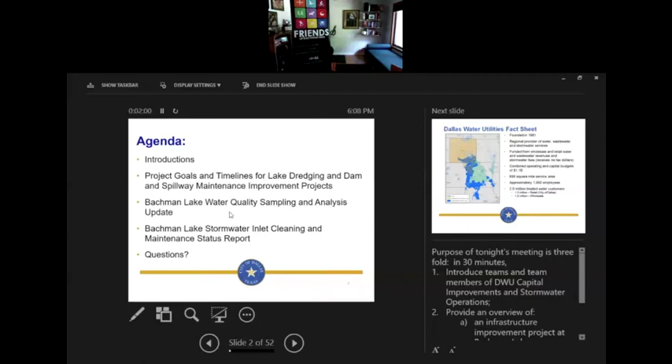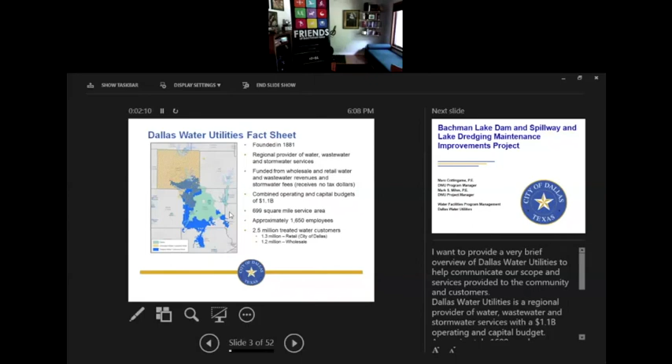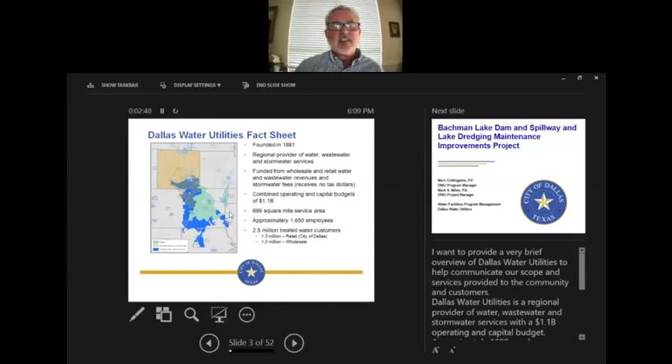You should have in front of you a map, generally speaking, of Dallas County and some of the surrounding counties with Dallas in the middle. Just wanted a brief overview about Dallas Water Utilities and to communicate our scope of services and what we provide to the community and customers. Dallas Water Utilities is a regional provider of water, wastewater, and stormwater services. Our operating and capital budgets range about $1.1 billion. We have about 1,600 employees and serve about 2.5 million customers over a very large area — about 699 square miles. Dallas Water Utilities' responsibilities include operation and maintenance of its infrastructure to continue providing water, wastewater, and stormwater services to the customers of Dallas. So that's just a brief overview of Dallas Water Utilities.

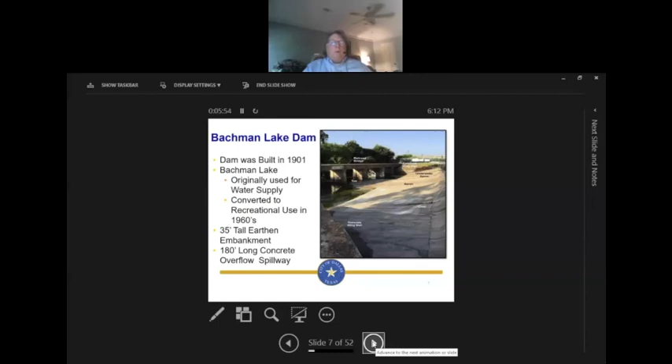This is a concrete spillway. This is a railroad bridge that we're able to bring rail cars of chemicals needed to treat the water to the Bachman plant. And then this is the spillway that conveys the water. On this side is the emergency spillway.

In the event of a high flood condition or really heavy rain, when the water level rises in the lake, dams have an emergency spillway to protect the earthen embankment from erosion. So it spills over through this low area and works its way down this way. There's a pond back here with some trees, and the work we'll be discussing will involve building up the earthen embankment on this side and replacing this concrete spillway and the railroad bridge. Also, the trees that have overgrown into this channel will be removed because we need to improve the passage of water for flood protection.

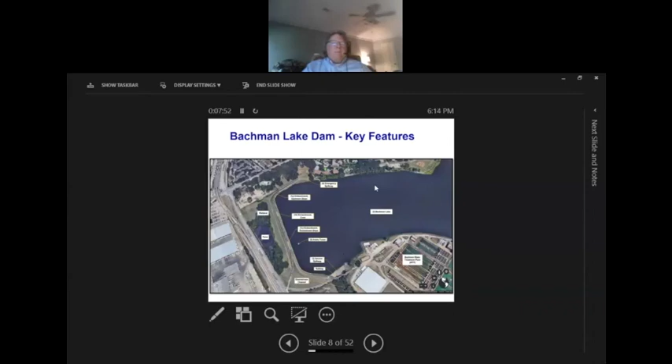And part of that is dredging of the lake. Over time, runoff with soils and erosion from the creek bed upstream deposits in the lake, and the lake has become quite shallow to the point where rowing sports and so on really can't use large sections of the lake because it's so shallow.

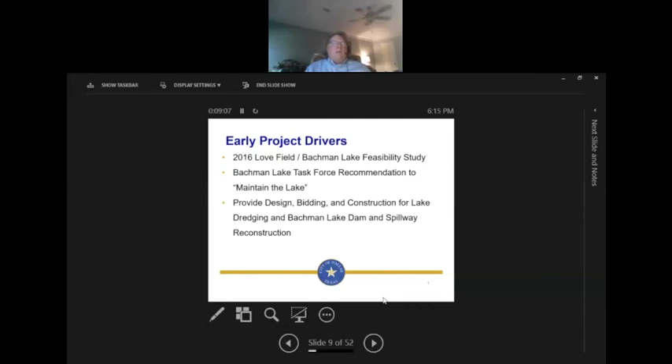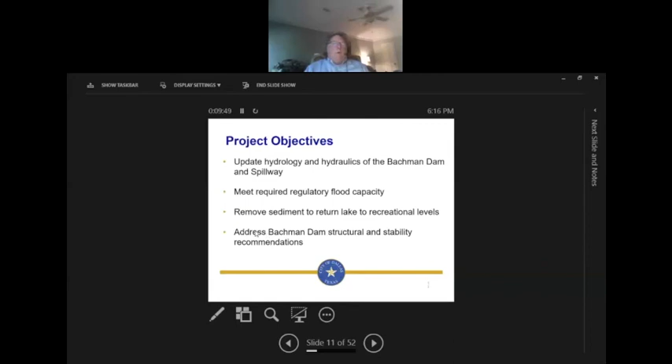So let's talk about the goals and timelines coming up. One of the objectives of the project is to update the hydrology and hydraulics of the Bachman Dam and spillway. We need to make sure the new spillway design and construction meets the required regulatory flood capacity. We're going to remove the sediment that's built up in the lake to return it to recreational levels. And by adding soil and structural components for the embankment and spillway, we'll improve the structural stability of the dam itself.

These projects are important because dams have several ways they can fail, and they have to be maintained and repaired after floods and erosion events. Dams will typically have some of these issues going on, like a boil or seepage through the soil used to build the dam. Sometimes the concrete for the spillway will crack.

Rodents can bore into dams and levees, and that can be a problem. That's a big problem in New Orleans with nutria. And then there are various things that can just decay after a while.

So the dam is 120 years old, and we do need to do some things to improve the dam and improve the maintenance, such as the trees that are overgrown in the spillway and seepage issues.

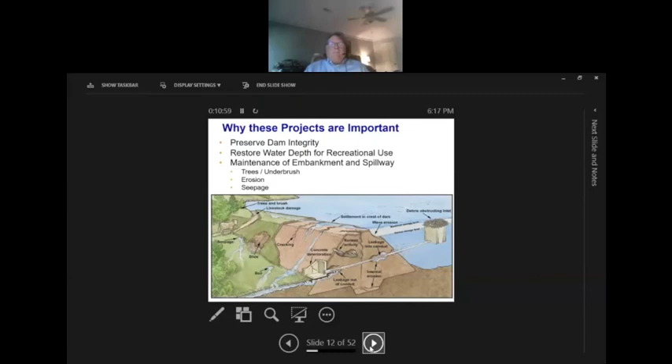On the timeline, we had a very busy summer on the project. There was a lot of data and background work that has to be done before the dredging could be designed and before the structural repairs and enhancements to the dam can take place. Part of that was a freshwater mussel survey in the lake looking for endangered freshwater mussels.

The bathymetric survey is done in the lake to determine the volume of silt and buildup of soils and deposits that have to be dredged out, so we can calculate how much that'll be in cost. There were cultural resources investigated, a topographic survey around all the lake, geotechnical investigations, waters of the U.S., and wetlands investigations. All that has been accomplished, and the reports have been filed with the agencies that need that information for us to move forward.

So in our timeline, this is where we're at right now. We're in our August 2020 meeting with Friends of Bachman Lake. We're on schedule. This winter, we'll complete the dredging design, and we'll advertise for bids to complete the dredging of Bachman Lake.

The next thing that'll happen around the same time is the dam rehabilitation final design report will be produced by our consulting engineer, Stantec Engineering. There'll be another stakeholder meeting to give a project update sometime in the winter.

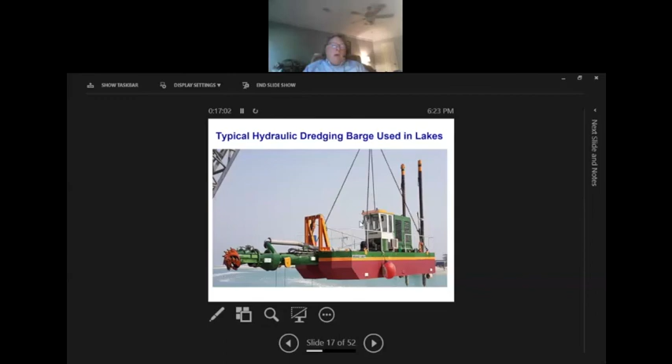And the way this works is this is kind of like a boat, a barge. It moves around the lake. This cutting rig is lowered down to depth, and the mud and silt is sucked up and pumped to shore. At the shore will be dewatering equipment that'll dry out that mud or press the water out of it. The water will be returned to the lake, and the solids and soils will be hauled off to be used as beneficial cover at landfills.

So in our milestone summary, just getting back to where schedule's at, we've completed the field work. The dredging design will be done in the winter. We'll begin the dredging work next spring. We'll begin the final design this winter, and that design will be completed in fall of next year. We'll be done with the dam construction in summer of 2023.

So now I'd like to turn over the presentation to Sergio Munoz, and he'll talk about stormwater operations and the water quality program. Thank you, Mark.

Thank you very much. We're with the stormwater operations and water quality in the neighborhood drainage services. My name is Sergio Munoz. I'm the interim program manager for neighborhood drainage services. We'll also have with us Nusrat Munir. She's the environmental manager II for neighborhood services.

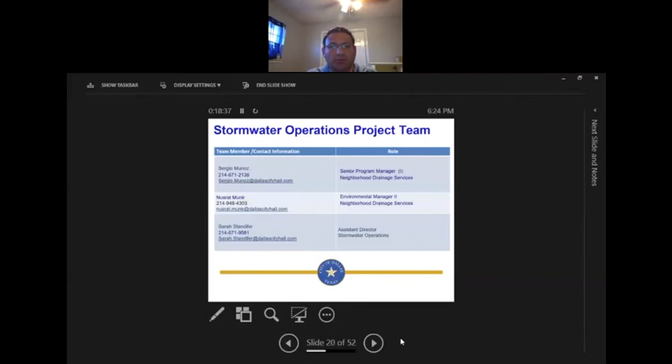Next slide, please. Here, similar to what Mark Cottingham mentioned, we have our names here with our phone numbers and emails to detail everybody. Someone I did not introduce is Sarah Standifer. She's our assistant director for stormwater operations, and she also has her contact information there as well.

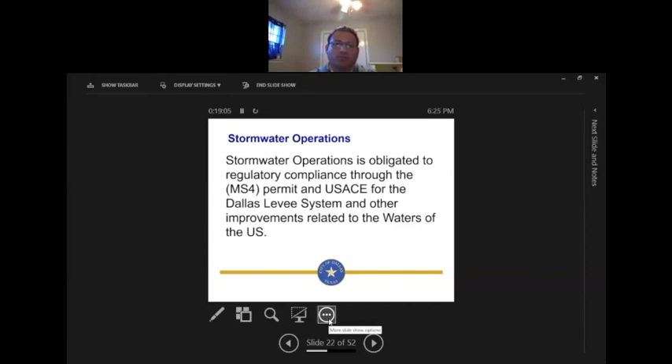I'm going to give a brief overview of the stormwater operations and its responsibilities. Next slide, please. Stormwater operations is obligated to regulatory compliance through the MS4 permit and the USACE for the Dallas levee system and other improvements related to the waters of the U.S.

There's about 1,800 miles of storm sewer, about 30 miles of levees, 13 pump stations at 8 locations, 6 pressure sewers, 8 street pump stations, and about 661 miles of channels. These include both public and private channels. There's also about 39,000 acres of floodplains.

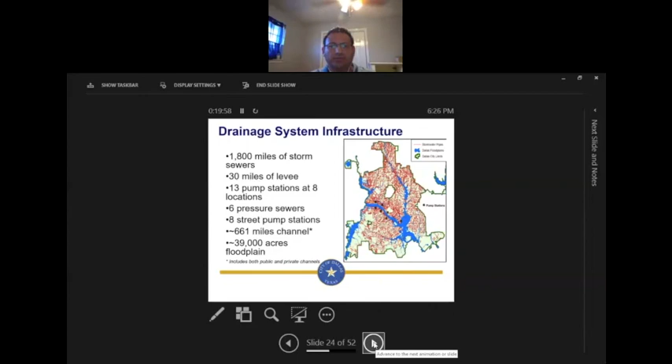Next slide, please. I would like to turn it over to Nusrat Munir, who will continue with the water quality. Thank you, Sergio. Good evening, everybody. My name is Nusrat Munir, as Sergio introduced, and I'll be going over the water quality program and Bachman Lake data today.

The city of Dallas is permitted for the municipal separate storm sewer system through the Texas Commission on Environmental Quality. This program includes several components, which includes maintenance of storm sewer system and the surface runoff water quality program.

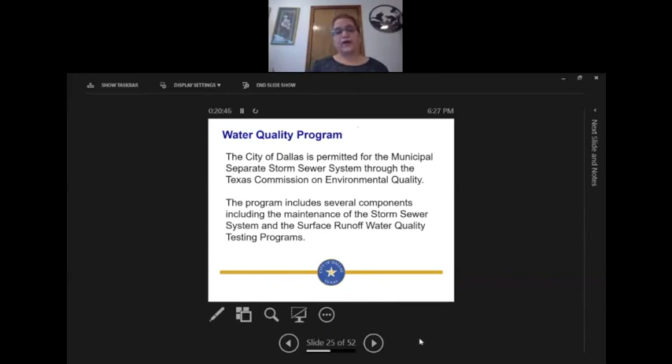Next slide. The surface water quality program is divided further into sub-programs like wet weather program, dry weather program, bioassessment program. All these programs have approximately 120 sites located all over the city of Dallas. 28 sites are for local wet weather.

28 sites are for local wet weather. 12 are regional wet weather sites. The regional wet weather sites program is run in collaboration with North Central Texas Council of Governments. And we have 72 bioassessment sites.

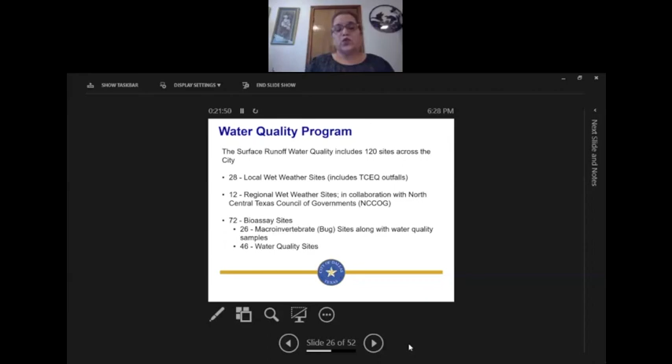We collect water quality samples from all of the 72 sites, but there are 26 sites from where we collect macroinvertebrates. These are bugs we collect from the water quality sites, and the bugs play a very important role in determining the quality of the water. If we find pupae or larvae of caddisfly, mayfly, and stonefly—these are very delicate insects—if we find lots of these, it means the water quality is good. On the other hand, if we find lots of leeches, snails, flatworms, they can tolerate pollutants, so that tells us the water quality of that creek is not so great.

And the water quality program, as I said, is further divided into different programs. So dry weather is one of the programs where we do inspections of outfalls. There are approximately 7,500 outfalls that we inspect during the 5-year permit term.

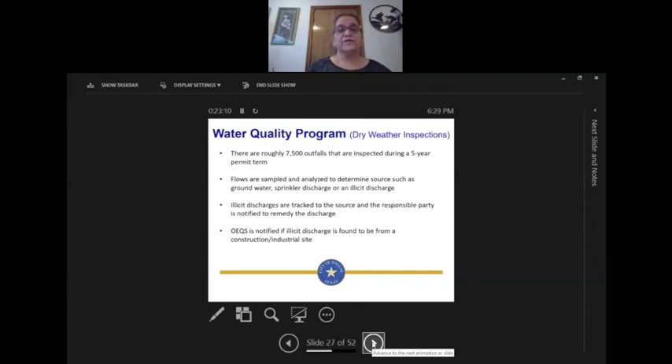If any flow is observed during the inspection, a water sample is collected and analyzed to determine the source, such as if it's groundwater, sprinkler discharge, or an illicit discharge. If it's determined to be an illicit discharge, it is tracked to the source, and the responsible party is notified to remedy the discharge. The Office of Environmental Quality and Sustainability is also notified if illicit discharge is found to be from a construction or industrial site.

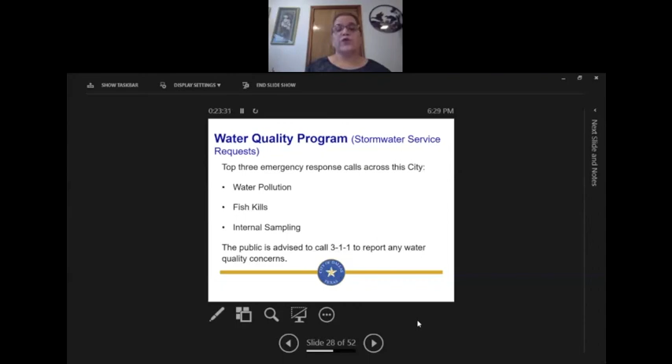Water quality team also responds to service requests. The 3 major service requests that my team responds to are water pollution, fish kills, and internal samplings. The public is advised to call 311 to report any water quality concerns.

We also have special projects in the water quality program. The special projects' lifetime could be 6 months to a year, up to 5 years, depending upon the program. So we sample either on a quarterly basis or monthly basis.

There's a program, the Clean Rivers Program, run in coordination with Trinity River Authority. We sample on a quarterly basis and send a report to them. On a monthly basis we sample the Powerhole Wetland Project, Bachman Lake, and Kidd Spring.

We also have three litter booms installed at Bachman Lake, White Rock Lake, and Lake Cliff. These litter booms help collect floatable trash and prevent it from entering the connecting water body. Reports are sent to the appropriate personnel within the Parks and Recreation Department detailing trash accumulation and maintenance if needed.

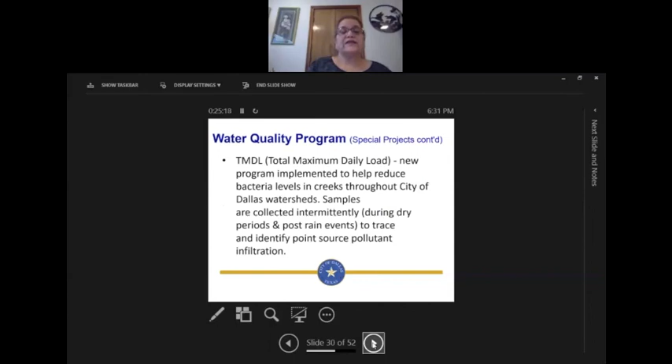TMDL is total maximum daily load. This is a brand new program implemented this year. The overall goal is to help reduce bacterial levels in creeks throughout the City of Dallas watersheds. Samples are collected intermittently during dry periods to trace and identify point source pollutant infiltration.

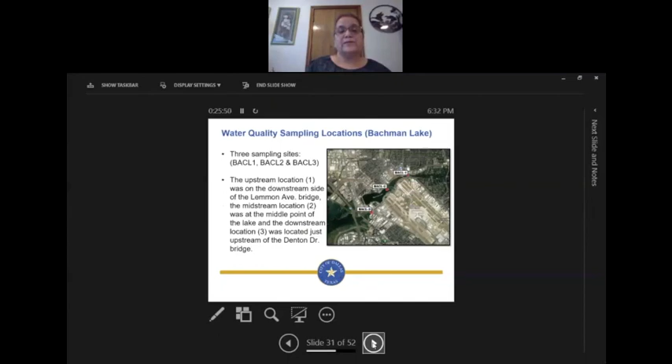For Bachman Lake, we sampled from January to June at 3 sites. BACL1 is an upstream site, located downstream of the Lemmon Avenue Bridge. BACL2 is a midpoint site located right in the center of the lake. BACL3 is the downstream site, located upstream of the Denton Drive bridge.

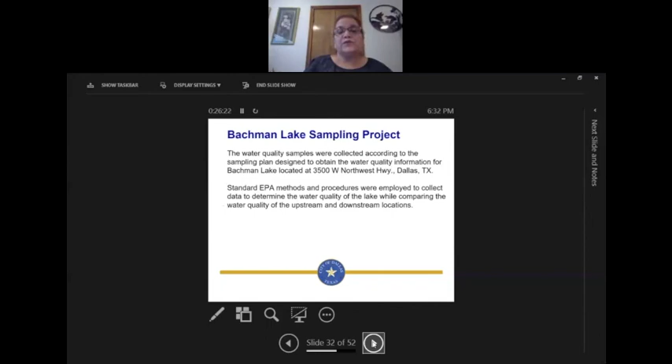For Bachman Lake sampling, samples were collected according to the sampling plan designed to obtain water quality information. Standard EPA procedures were utilized to collect data to determine the water quality of the lake while comparing the upstream and downstream locations.

The sampling plan included the following parameters, which we collected and analyzed: DO, pH, conductivity, ammonia, nitrates, total phosphorus, hardness, chlorine, metals, TSS, turbidity, and E. coli. No samples for TPH tests were collected because there was no hydrocarbon sheen observed during the sampling events.

All these parameters we collected are indicators of pollutants in surface water. For example, E. coli. In surface water, E. coli comes from either animal waste, like dog poop, or wastewater discharge. So it's really important that if we are walking our dogs, we should pick up after them.

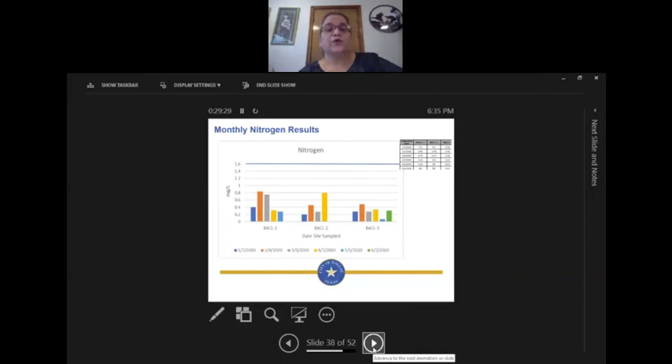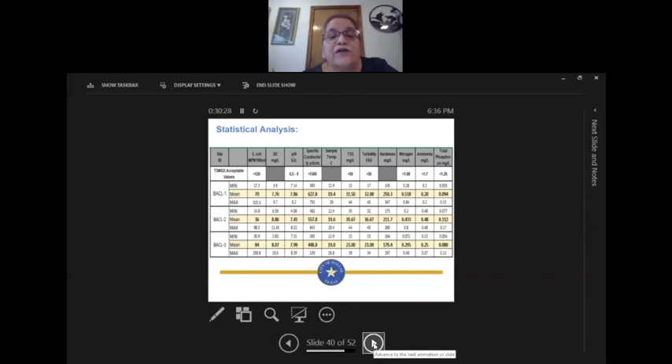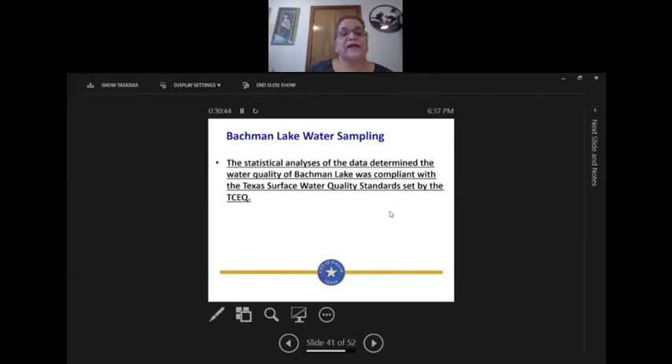Conductivity is less than 1500. TSS and turbidity were less than 50, so all the values meet the TCEQ established limits. So to conclude, the statistical analysis determined the water quality of Bachman Lake was compliant with Texas Surface Water Quality Standards set by TCEQ.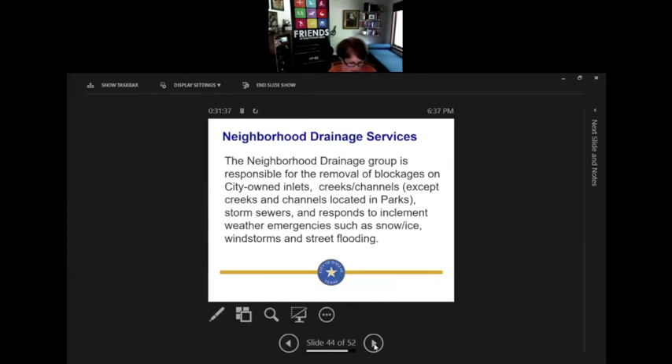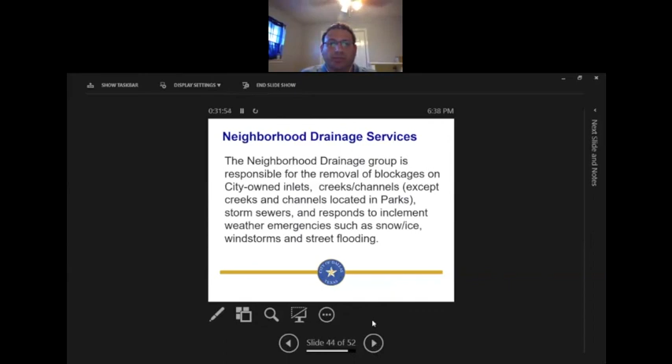Okay, let's get to it. Right, so we're almost done. The Neighborhood Drainage Services is a group that's responsible for the removal of blockages on city-owned inlets, creeks, channels—except creeks and channels located in parks—storm sewers, and response to inclement weather emergencies such as snow and ice, windstorms, and street flooding. Next slide, please.

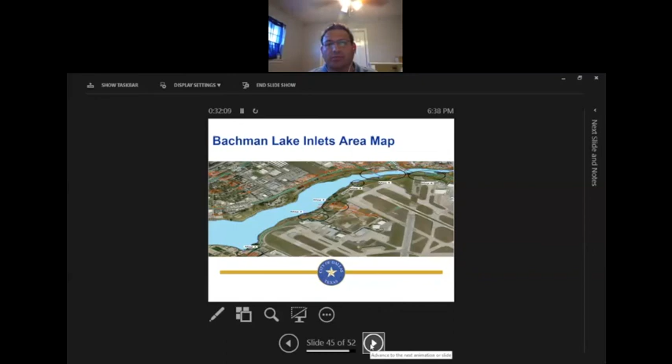You can see on the next slide where the locations are. Pretty much everything that's in red has been cleaned. We pointed out some of those through the next couple of slides. You'll see a close-up of each one of those. You can just walk through those.

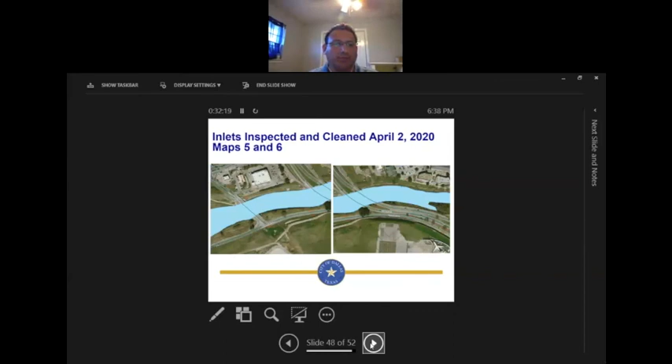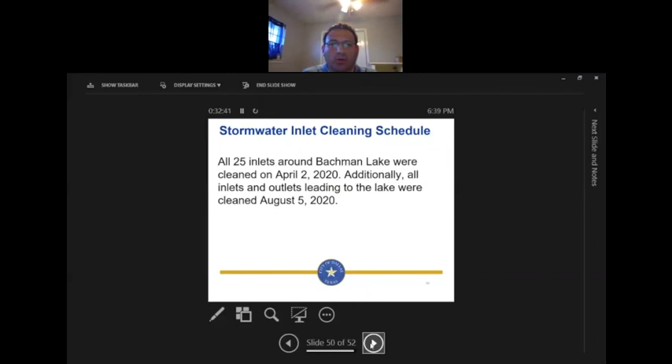It'll identify each of the locations where the cleaning was done. So, you can go to slide 49. It'll show the cleaning of all the inlets that was done as well. Next slide. Basically, as mentioned here, all 25 inlets around Bachman Lake were cleaned on April 2nd. Additionally, all inlets and outlets leading to the lake were also cleaned on August 5th, which was just a few days ago. And that was short and sweet.